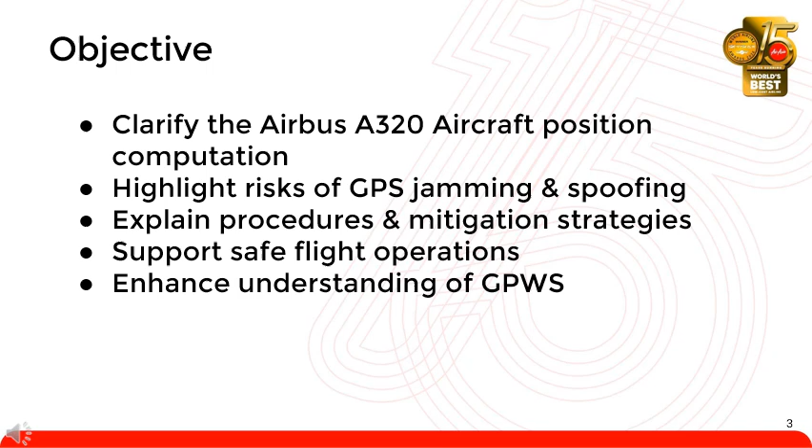The objective of this session is to provide a clear understanding of the A320's navigation system design and how it is affected by GPS jamming and spoofing. These threats can compromise navigation accuracy, which poses operational and safety risks. We will also explore procedures and mitigation strategies that help pilots recognize and manage these threats effectively, ensuring the safe conduct of flight operations. By the end of this session, we hope you will have a comprehensive understanding of the A320's navigation system, the risks posed by GPS interference, and how these factors relate to the Ground Proximity Warning System,

GPWS. The Airbus A320's flight management and guidance computers, FMGCs, each compute their own aircraft position, known as the FM position. This computation is based on a mix IRS position and can incorporate either a computed radio position or a GPS position. To ensure accuracy, the Flight Management and Guidance System, FMGS, selects the most reliable position by assessing the estimated accuracy and integrity of each source. This process ensures precise navigation and optimal performance throughout the flight.

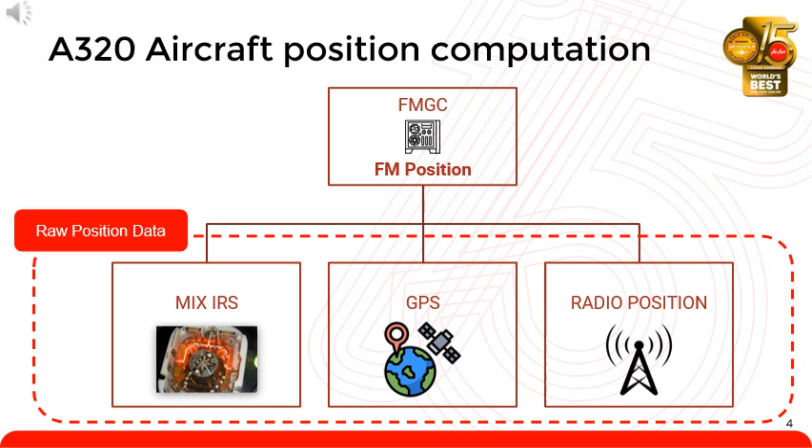The FMGC, Flight Management and Guidance Computer, does not rely solely on a single position source, but rather integrates multiple sources to derive the most accurate and reliable position. IRS, Inertial Reference System, GPS, Global Positioning System, and radio position sources, like DME and VOR, are used together in different combinations depending on their integrity and accuracy.

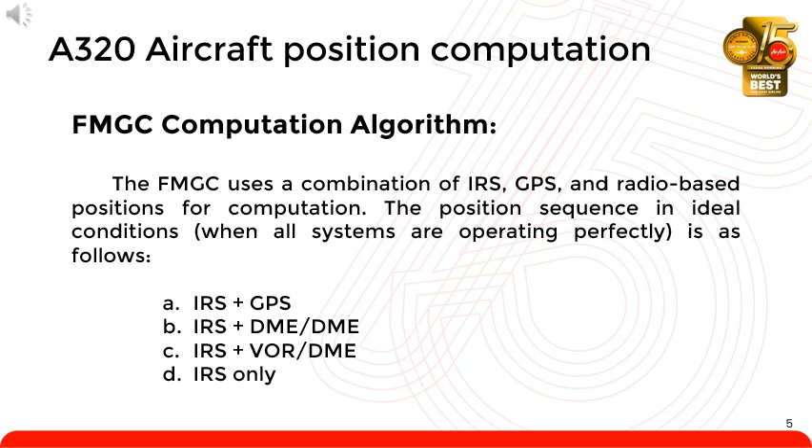In optimal conditions, when all systems are functioning correctly, the FMGC will prioritize the combination of IRS plus GPS as the preferred position source. In case GPS is unavailable or its accuracy isn't sufficient, the system will switch to IRS plus DME/DME, followed by IRS plus VOR DME. If all external sources fail, the system will use IRS only as a fallback. The FMGC continuously monitors the integrity of these sources and makes dynamic adjustments based on their performance.

The GPIRS position is a mixed position derived from the IRS and GPS systems, allowing for more accurate and robust positioning. Each IRS is responsible for selecting its own GPS data source to ensure the best possible GPS availability and reliability. The FMGC will receive 3 separate GPIRS positions from the different IRS units on board and needs to select the most reliable one. To do this, the FMGC uses a figure of merit to evaluate the positions and selects the best one using a predefined priority order.

The onside GPIRS position, the one from the IRS on the same side as the FMGC, is given the highest priority. If the onside GPIRS is unavailable or deemed less reliable, it will then select GPIRS 3. As a last resort, the opposite GPIRS position, from the other side of the aircraft, will be chosen. This selection process ensures that the FMGC always uses the most accurate and reliable position available.

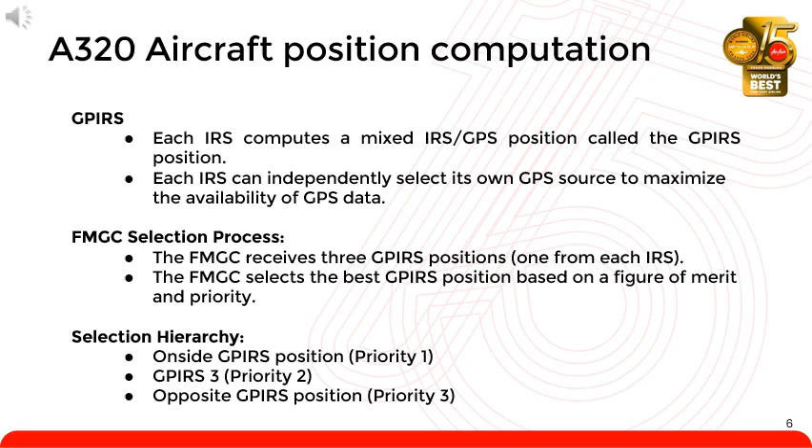Under normal GPS conditions, where the GPS signal is strong and reliable, each FMGC will prioritize the onside GPIRS position. For FMGC 1, this means it will select the GPIRS data from ADIRU 1, as it is the most reliable source in this scenario. Similarly, for FMGC 2, the GPIRS data from ADIRU 2 will be selected, maintaining the same priority order. This selection ensures that both FMGCs are using the most accurate and consistent position data available from the system, optimizing the performance of the aircraft's navigation system.

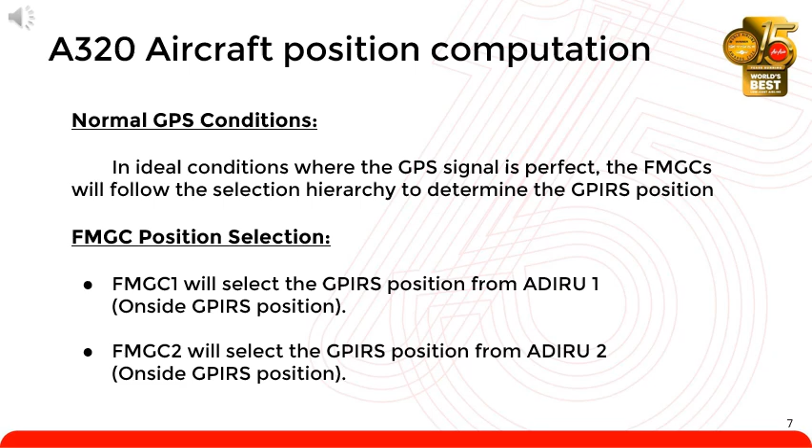In case of malfunctions, if any malfunction occurs with one of the IRS units or position sources, the FMGC will fall back on the remaining available sources, following the hierarchy. If the on-side GPIRS, priority 1, is unavailable due to a malfunction, the FMGC will attempt to use GPIRS 3, priority 2, and as a last resort, it will use the opposite GPIRS position, priority 3.

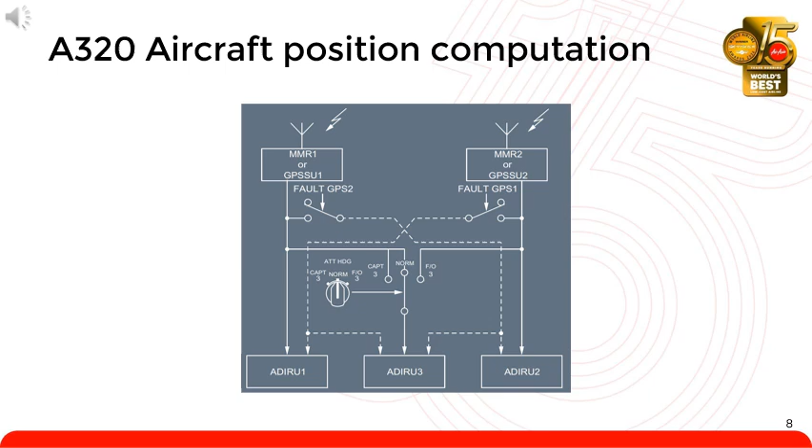This system ensures that the FMGC can always maintain an accurate position, even in the event of a malfunction or data loss from any one IRS or position source.

Under normal GPS conditions, when the GPS signal is strong and reliable, each FMGC prioritizes the on-side GPIRS position. However, the FMGC also continuously computes a mixed IRS position, compares it to the GPIRS position, and records the difference as a bias. In the event of GPS and radio signal loss, the FMGC automatically applies this stored bias to compensate for IRS drift. This strategy helps minimize the risk of IRS position degradation, ensuring greater navigation accuracy.

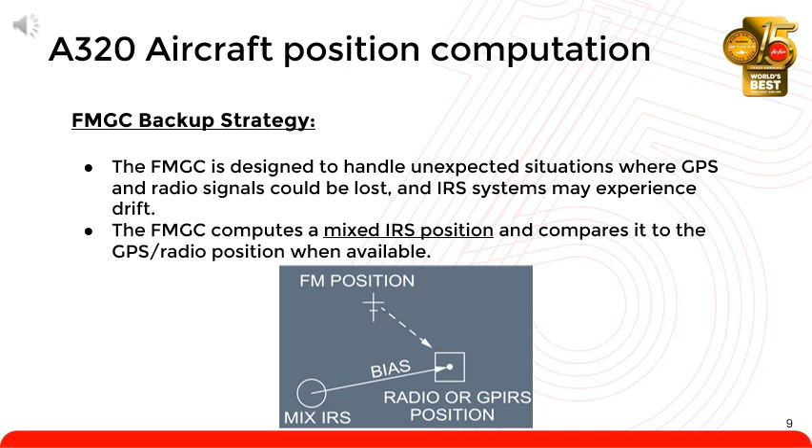Summary: in normal operation, the FMGC will typically use the GPIRS position, which combines GPS and IRS data from the ADIRU system to calculate the FM position. When GPS fails, the FMGC will no longer rely on GPS data. Instead, it will use the IRS data, along with a radio-based position, such as from DME or VOR, to calculate the FM position. This ensures continued positioning accuracy, even without GPS.

In the event that both GPS and radio signals fail, the FMGC will revert to the mixed IRS system, which combines data from multiple IRS units, and apply a bias to compensate for any drift or errors in the IRS data. This bias is computed by comparing the IRS position to the last known accurate GPS radio position, and it helps ensure the FMGC remains as accurate as possible until GPS or radio positions are restored.

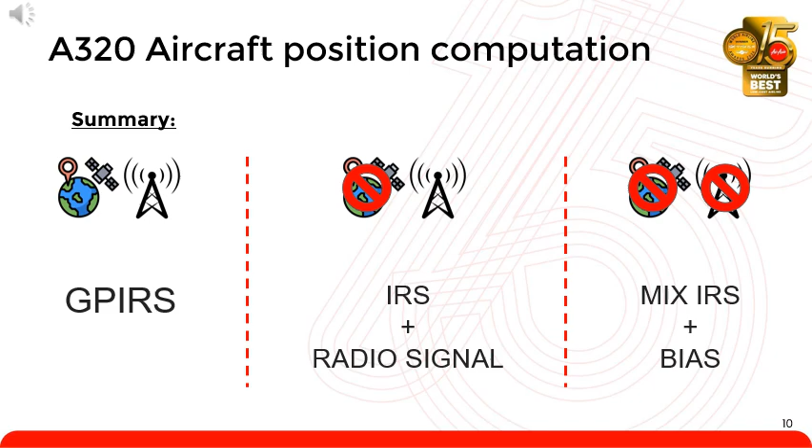Global Navigation Satellite Systems, or GNSS, including GPS, are essential for modern aviation. They provide precise navigation, approach guidance, and situational awareness, ensuring safe and efficient flight operations. However, the growing threat of GPS jamming and spoofing is becoming a significant concern for both military and civil aviation. These disruptions can compromise navigation accuracy, affect automated systems, and pose serious risks to flight safety. As reliance on GPS continues to increase, understanding and mitigating these threats is crucial for pilots and air traffic controllers.

GPS jamming occurs when radio frequency signals, whether intentional or unintentional, disrupt GPS receivers, preventing them from acquiring or maintaining a satellite signal. This interference can lead to a complete loss of GPS functionality, forcing the aircraft to rely on alternative navigation systems. GPS spoofing, on the other hand, is a more advanced and deceptive attack. Instead of blocking GPS signals, spoofing transmits false signals that mimic real satellites, misleading the receiver into displaying an incorrect position or time. This can create serious navigational hazards, as pilots may unknowingly follow inaccurate flight paths.

There are several reasons why GPS jamming and spoofing occur, ranging from military operations to unintended civilian interference. First, military and political conflicts. Some nations use GPS jamming as an electronic warfare tactic to disrupt enemy navigation and communication systems. This is particularly common in conflict zones or border regions. Next, security measures. Certain governments deploy GPS jamming to protect sensitive areas, such as military bases, government facilities, or airports, from unauthorized drone activity or potential security threats.

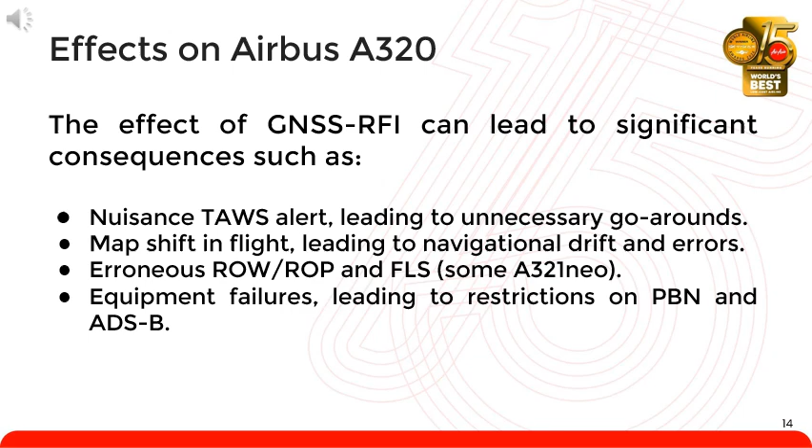As pilots, we have strategies in place to mitigate the effects of GNSS-RFI on our flights. Being proactive and well-prepared is key to reducing the impact of any interference during the flight. Conducting a thorough briefing before the flight is essential.

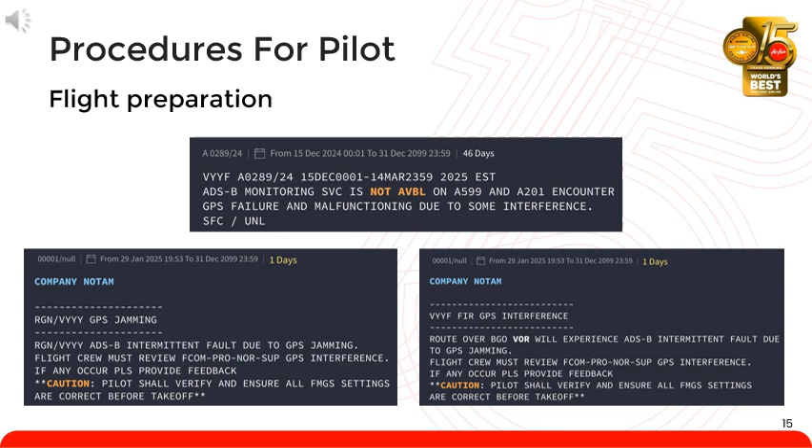By being vigilant and aware of potential issues, we can anticipate and respond to GNSS interference more effectively. To prepare for any GNSS-related disruptions, pilots should gather relevant information from several sources. FIR NOTAMs, Flight Information Region Notices to Airmen, will provide any alerts or warnings related to GNSS interference in the areas we'll be flying through. Company NOTAMs will give us internal updates, often providing guidance on how to deal with any GNSS or GPS signal issues specific to our airline's operations.

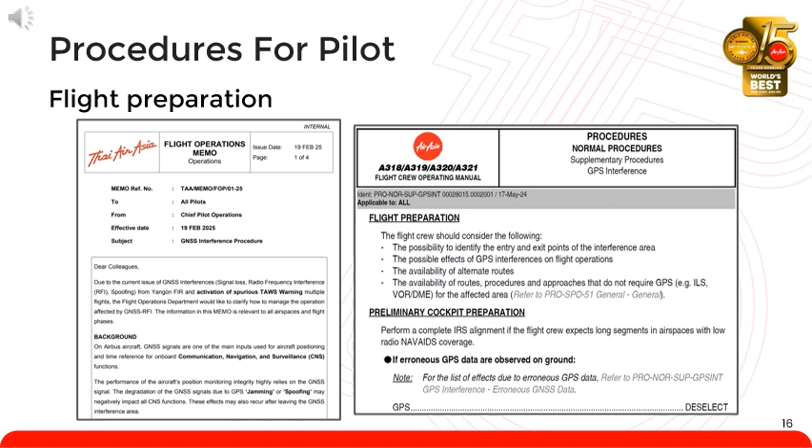TAA/MEMO/FOP/01-25 GNSS Interference Procedure. This document provides a structured approach to dealing with GNSS interference, outlining the step-by-step actions to take if interference is suspected. Supplementary GPS interference procedures. This set of procedures is designed to support pilots in the event of GPS interference specifically, helping us mitigate any disruptions to GPS functionality.

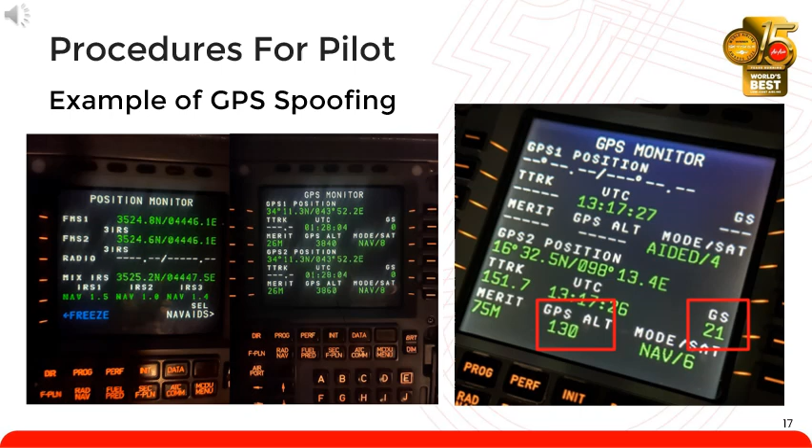In this slide, you can see an example of GPS spoofing, which is a form of GNSS interference that intentionally manipulates GPS signals to provide false location information. On the GPS monitor page, we can observe the signs of spoofing, which may include discrepancies between actual position and GPS readings, where the aircraft's position may be shown incorrectly on the map, sudden jumps or shifts in the GPS signal, indicating that the GPS system is being misled by falsified signals.

The generic name of the system that fulfills the terrain awareness function is Terrain Awareness and Warning System, TAWS. The TAWS alerts the flight crew in a timely manner of hazardous situations ahead of the aircraft to avoid controlled flight into terrain, CFIT. Honeywell was the first to propose the Ground Proximity Warning System, GPWS, followed by the Enhanced GPWS, EGPWS. Later on, ACSS released an integrated solution combining the traffic awareness and the terrain awareness functions, the Traffic and Terrain Collision Avoidance System, T3CAS.

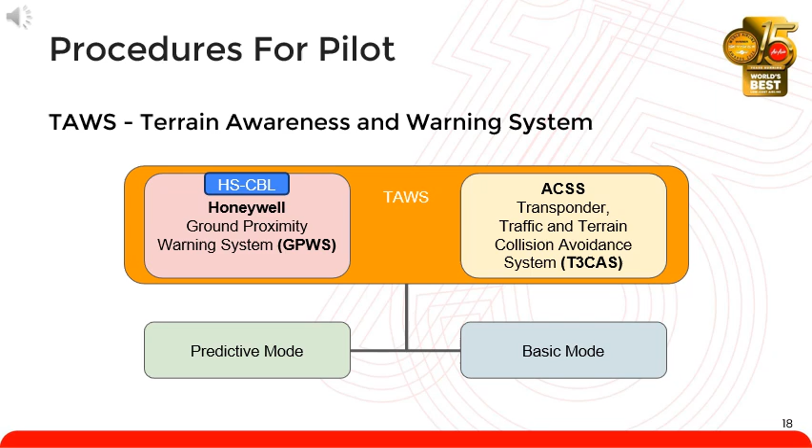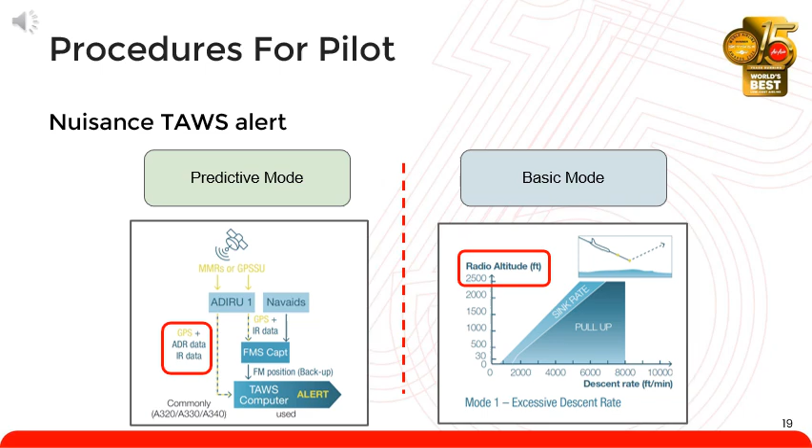As shown in the pictures on this slide, the basic mode uses the radio altimeter to trigger a GPWS basic mode alert. In contrast, the predictive mode directly relies on GPS data. This reliance on GPS makes the predictive mode vulnerable to issues such as GPS jamming or spoofing, which could lead to nuisance TAWS alerts. Even with multiple resources available on board to compute position, these vulnerabilities still exist.

Both basic mode and predictive mode feature a terrain avoidance function, but there are differences in the aural alerts. According to the FCOM, the aural alerts in basic mode are terrain, terrain, and pull up, while in predictive mode, the alerts include the words ahead and avoid. This distinction allows pilots to identify whether the alert is triggered by basic mode or predictive mode. However, regardless of the mode, any GPWS alert during flight requires a safety report to be filed in accordance with OMA.

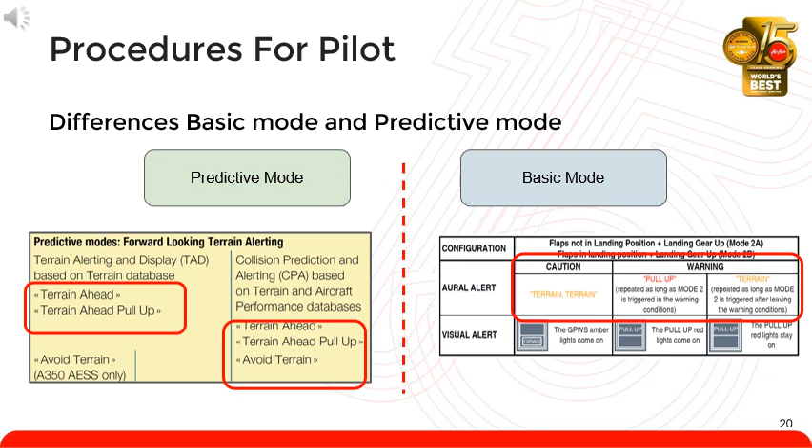There are several switches on the GPWS panel, and it's important not to confuse the system push-button switch with the terrain push-button switch. When you turn off the system push-button switch, it will inhibit basic modes 1 through 5.

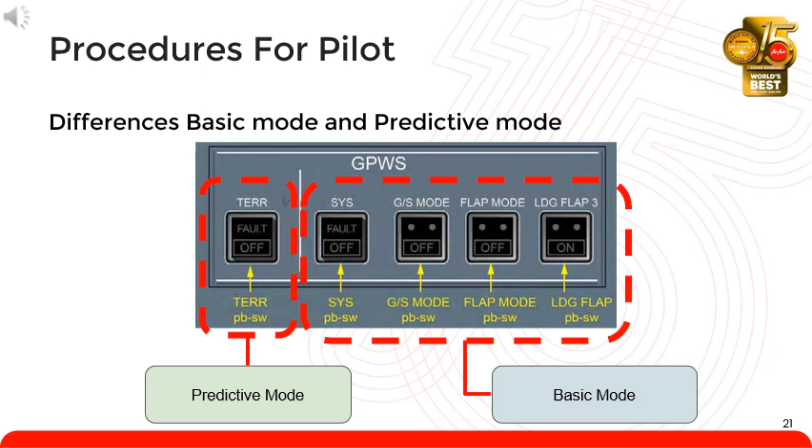For the TAA/MEMO/FOP/01-25 GNSS interference procedure, it's recommended to use the terrain push-button switch to inhibit nuisance TAWS alerts when experiencing GPS jamming or spoofing.

The TAA/MEMO/FOP/01-25 GNSS interference procedure recommends switching off the TERR push-button switch, TERR-PBSW, when entering airports and areas of potential GNSS-RFI identified in this MEMO or company NOTAM, which inhibits the predictive modes of the GPWS. However, the basic GPWS modes 1 to 5 remain active.

In the event of a TAWS alert triggered by a basic mode, pilots must acknowledge the alert and immediately comply with the required memory items.

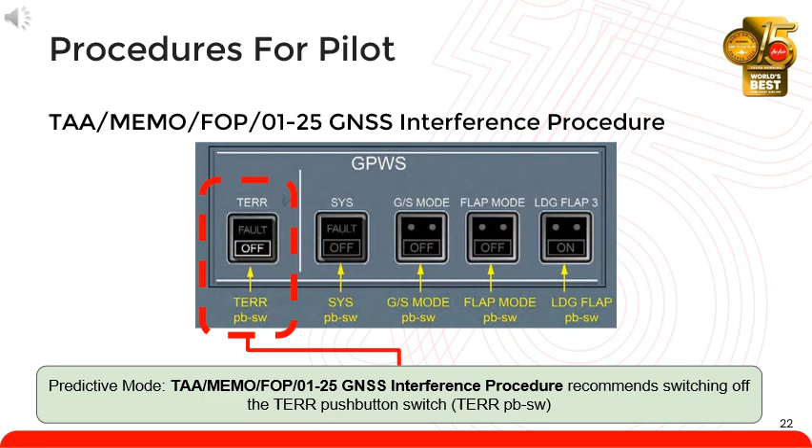In conclusion, GPS jamming and spoofing present significant risks to aviation by disrupting navigation accuracy and automated flight systems. While the Airbus A320 can rely on the inertial reference system in the event of GPS signal loss, IRS accuracy deteriorates over time, requiring pilots to remain vigilant and proactive.

To mitigate these risks, pilots should be prepared to manage such disruptions by gathering information from all available sources, including FIR/NOTAMs and company NOTAMs, becoming familiar with the supplemental GPS interference procedures and the TAA/MEMO/FOP/01-25 GNSS interference procedure, coordinating closely with air traffic control, ATC, during flight if GPS interference is encountered, and filing a safety report in the event of any GPWS alert during flight, as this is mandatory.

By staying alert and adaptable, flight crews can maintain safe operations even in environments affected by GPS interference.